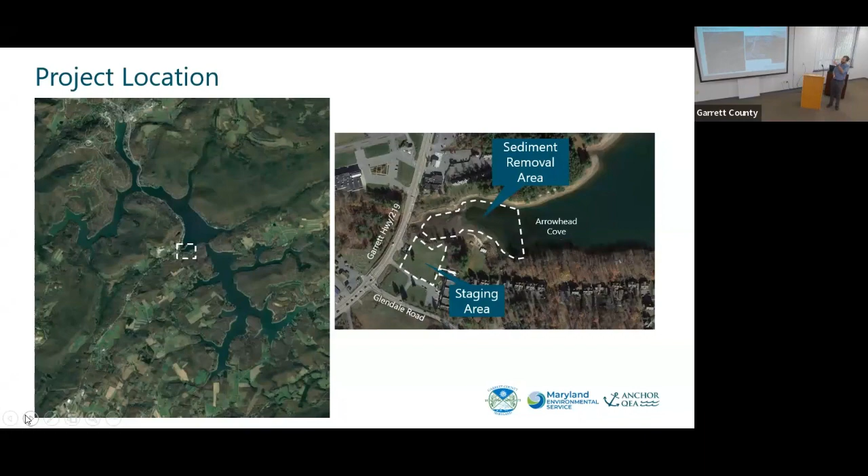As Bruce mentioned, most of you are familiar with the lake layout, but just for reference, the sediment removal area we're talking about is Arrowhead Cove. The staging area is on the lawn area right adjacent to the inn. We're right in the dead center of the lake, off to one side. That dashed line represents the footprint of the removal we're doing inside that cove.

As Bruce had mentioned, we've got a long history within this area. Back in 1925 is when the original dam was constructed. 1980 is when DNR took over some of the responsibilities. Then back in 2000 is when DNR actually purchased that lake bottom and took on more responsibility, including the buffer strip, which was purchased from the hydroelectric facility.

Obviously it's a very large lake, about 3,900 acres roughly, with a lot of side coves. As you're all aware, it's a very large recreational hub for this area. You've got a lot of use during the summertime, and that's when you've got higher water levels compared to the lower water levels in the winter.

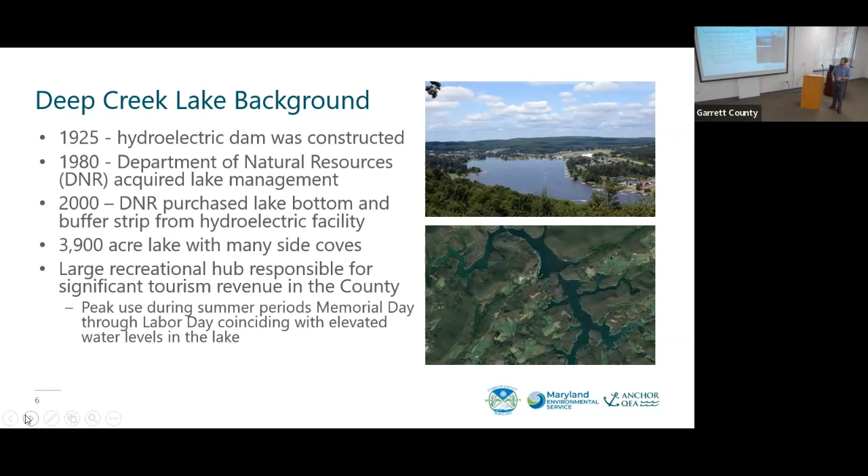So the major issue we've got right now is this sediment accumulation.

Do we need to pause for anything? No, I'm just trying to get rid of this. So you can see a little bit more.

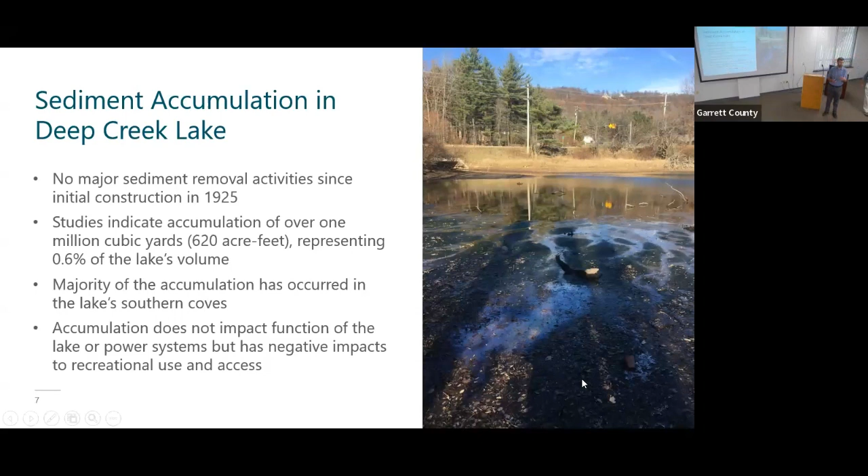For reference, sediment accumulation has been ongoing since this was built back in 1925. Ongoing sources of sediment into the lake are something to be concerned about, but studies indicated there's a lot of volume, and right now the majority has accumulated in the southern coves. It's not actually impacting the lake's ability to function as a lake system, but it does have negative impacts on recreational use and access to a lot of these areas, particularly those southern coves.

Each of the coves as part of that study were evaluated on a series of point rankings for all these different criteria. Looking at how things ranked out, Arrowhead Cove ended up being the eventual selected cove back in the 2016-2017 study.

There's a lot more information on this study available. It's on the website, so there will be a link at the end of this presentation, and it's in the information provided in the back. If you have questions on how we got to this point, there's a lot of information available there, but I'll continue on to the rest of the information from here.

So how are we actually going to do this sediment removal is a key question. Mechanical excavation - you might hear us call it dredging, but mechanical excavation is really the target for this project. We're looking at taking out up to 15,000 cubic yards. That may vary a bit depending on the available budget. We're going to have a bid coming out that's going to be selected, and we may have to adjust that volume slightly, but the target is up to 15,000 cubic yards.

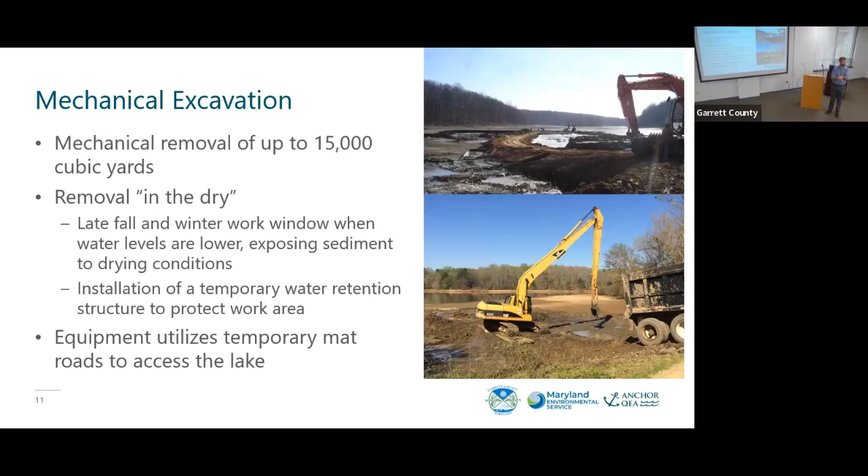A little bit more on the water retention structure. Again, we're going to be holding back some of that lake water. The easternmost portion of the removal footprint does not get fully dewatered, even at that low water condition of the winter. So we're going to be using a temporary structure to hold that water back.

We're going to be allowing the contractor their options, but essentially these structures will help retain that water out of the work area. And then we just have to manage either stormwater and anything else that kind of leaks through the system a little bit, rather than having to deal with all the sediment in the wet.

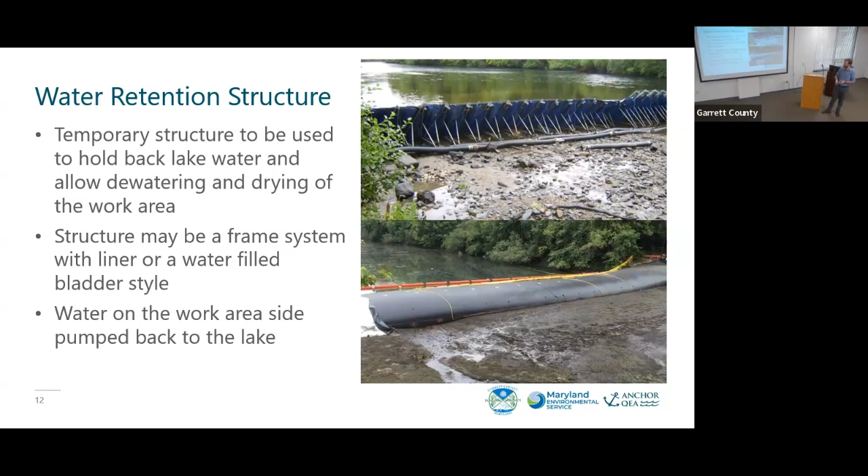The main focus of this removal and the footprint that was developed was for increased recreational access. You can see the overlays of some of the docks that we'll be capturing and getting allowed a little bit more access to some of these footprints. And we're also capturing material further back towards the creek entrance. That's going to allow material to deposit over the years so that this doesn't continue to occur for a while.

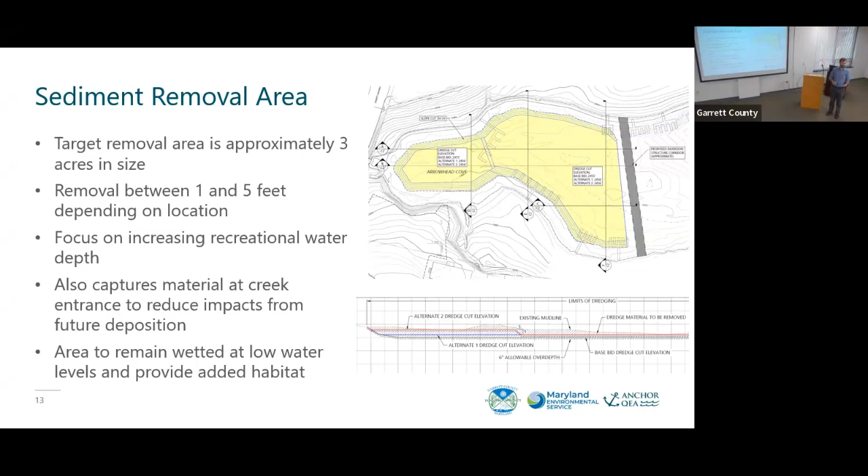We'll be able to allow some of that material to settle out before we get to the rest of the docks, so we can do some of that clean out. And this is also going to increase the wetted footprint over the winter time, which is going to be a little bit more of a habitat benefit and less of that mud flat exposed footprint that you'd be seeing normally.

From there, we'll jump to the staging area - just adjacent to the work. One of the other reasons that Arrowhead Cove was selected was the availability of the footprint right adjacent to the inn. Most of the footprint's really going to be a stockpile area.

Even though the sediment's going to be dewatered prior to the installation, once we get that dam installation installed, it's going to be drying during that entire process. There's still going to be a little bit of water, especially as you get a little bit deeper into that sediment. So as material is removed, it'll be hauled up to the stockpile, placed there. And that stockpile area is going to be graded and drained to a sump, essentially, to collect any remaining water coming off of that.

If you ever scooped up a bucket of sand, that water that weeps out, we're going to be collecting that, filtering it, and then discharging that back to the lake. That's going to be contained within the stockpile footprint.

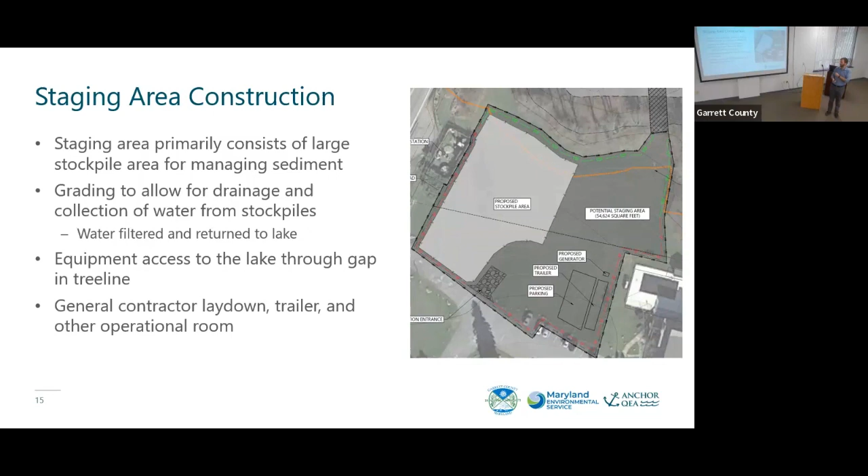Entrance and exits we'll talk about next. We understand traffic has been a big impact to the people that live and work in this area, so what we're working on right now is developing that traffic routing. The anticipation is coming off of Garrett Highway, making a right turn into the property, that way we're not slowing down traffic or crossing multiple lanes, safe and easy access coming off that side.

Exiting, we come out onto Glendale, make a right, and then make a left turn onto the highway at the stoplight. So we're not having trucks crossing a lot of traffic, keeping that relatively simple. There may be some occasional deliveries that break that out depending on which direction they're coming from, but this is the majority of the traffic routing.

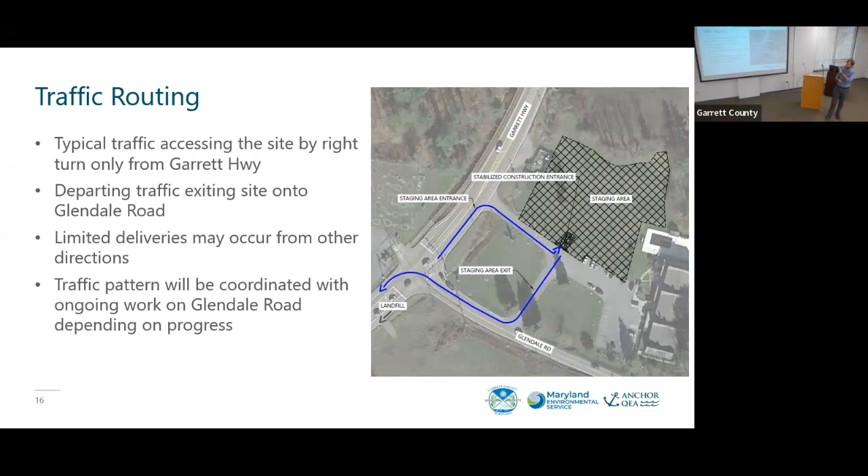We know Glendale Road has a lot of construction work ongoing right now. We'll be coordinating with them depending on how that proceeds the rest of this summer. The anticipation is the work out in front of this footprint will be done before we start our work. If that's lagged, we'll coordinate with that contractor to understand how traffic may be adjusted, working with those guys doing that work right out in front.

From there, the sediment reuse. One of the key things to keep the cost of the overall project down is we don't want to dispose of the material or pay a landfill disposal fee. The testing performed on this material shows it's clean sediment from this pristine lake. We really have no issues with it, but we need to find a place for it.

Earlier on during the design evaluation, we looked at a lot of close options, including the landfill that's just a few miles away. Essentially, that landfill needs cover material for their daily operations, and with this clean material and a relatively short haul distance, we can provide a large source of material for them to reuse as part of their daily operations.

We don't need to pay a tipping fee, and they gain as far as providing extra material. It's material that's very consistent and clean. A lot of times they'll get borrow material that may not be as clean or may be coming from different sources. This gives them a lot of good, clean material that they can use.

And they've also got a lot of space. If there's any remaining water with the sediment, they can spread the material out and allow it to dry further as needed.

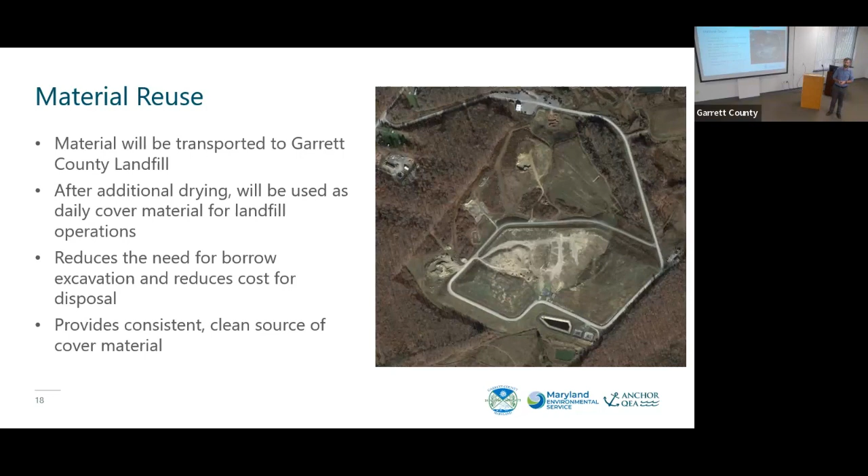From there, site restoration. We'll be doing a couple different features: some in-water restoration, and restoration of the staging area itself. There will be some in-water habitat structures installed along the edges of the dredge area after all that sediment removal. This was a request working with DNR, and essentially rock clusters will be installed close to the shoreline outside of that boating footprint.

These generally consist of large boulder structures about 3 feet in height or so, providing some fish habitat, some places for fish to hide, trying to increase that habitat value.

Now that we're deepening this, it'll be wetted throughout the winter. We've got some options for increasing the habitat footprint in this. Eventually, there will also be submerged vegetation installed, though that won't be done by this particular contractor.

It's something that will come a little bit later in 2024, but that'll be a larger footprint that's expanded out adjacent to some of these areas.

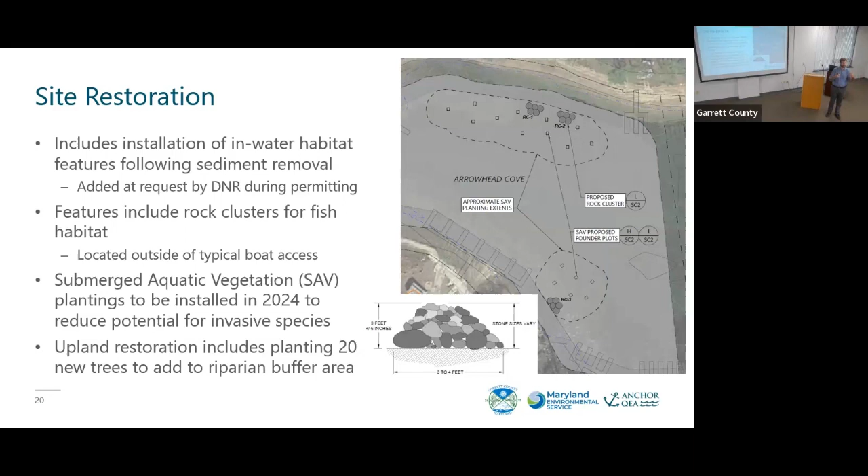On the upland side, after we've done all the grading work and removed the staging area, that grassy area will be reseeded, and there's actually going to be installation of 20 new trees. The riparian buffer, that tree line, is very narrow, and working with DNR, we're looking to increase that tree buffer.

To provide a little bit more break point between the upland area and the lake itself. So what to expect - obviously there's a lot of concerns and questions about what we're going to see during the construction. From the noise perspective, they have to comply with the noise ordinances, just like any other contractor.

The work right now is looking at 7 a.m. to 5 p.m. We're going to be getting into the wintertime, so they'll probably be cutting that off a little bit depending on light. But a lot of the truck traffic is actually going to be ending a little bit earlier because the landfill closes at 3:30. So there may be some additional work done on the site, but a lot of that truck traffic is going to be done by that point.

From the traffic sense, we're going to have some heavy equipment showing up at the start to help build that staging area - getting the excavator, the loaders, the different pieces of equipment out there. After that, you're primarily going to be seeing dump trucks hauling that sediment from the stockpile area to the landfill. For reference, we're somewhere on the order of maybe 10 to 15 trucks a day running during that period.

So you're seeing a couple each hour, just for general reference, and again that's heading down to the landfill heading south on 219. From the safety sense, we want to make sure we don't have any issues with the public, so the site's going to be fenced off, traffic patterns clearly marked. We're looking to do everything we can to make sure the trucks and other equipment are accessing that site as safely and cleanly as possible with as little impact to the public.

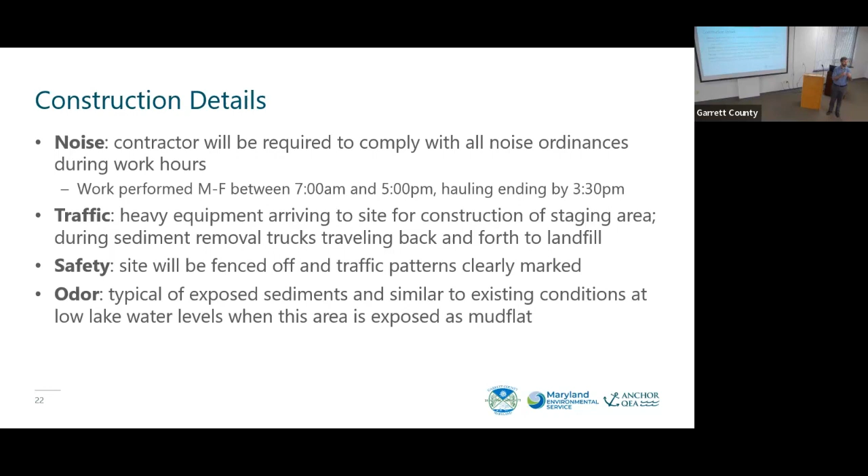And then a question that often comes up when we deal with sediment is odor. So essentially when you're exposing sediments, there can be a smell associated with that. We did want to point out it's very similar to what you're dealing with right now - there's really not a lot. And when it's dried out, you lose a lot of that odor-generating material. So as we're drying out, it's going to be similar to how it would be at the very end of the year, with very little additional as we're storing it and taking it off site. So pretty typical to what you may see during the regular year.

Schedule - right now the project's out to bid, and we're actually going to be doing a bid opening at 1 o'clock on Friday, so we'll have a little bit more information at that point. We have to go through selecting the final contractor, negotiating the contract details, and developing that final notice to proceed with the contract. That's expected to come later this summer.

There is some additional permitting coordination ongoing. We've got most of the major permits - MDE, coordination with DNR. There's a couple of the smaller permits we're still working on; they'll be finalized over the summer.

Construction start after Labor Day - just for reference, that's most likely looking at starting some of the staging area construction. What we're looking at is with the water level dropping after Labor Day, the contractor is expected to start the in-water work a little bit later. They've got at least a month's worth of work trying to set up that staging area, get their equipment, and get the grading worked out.

So it'll be a little bit later after that, but we may start to see some activities after Labor Day. Again, as we get more information when we select a contractor and get their schedule, there'll be updates on when this is going to actually happen that we can provide later this summer. Just for reference, based on the permits, everything has to be done by March 1st - everything has to be out of the water, fully complete. So as we get started, we'll be working through the wintertime, with equipment pulled at the very latest February 28th.

That's the primary work. There will be some more activities in 2024 - there's going to be seeding of the staging area, and there's going to be that submerged vegetation planting, but the majority of the work's really done this winter.

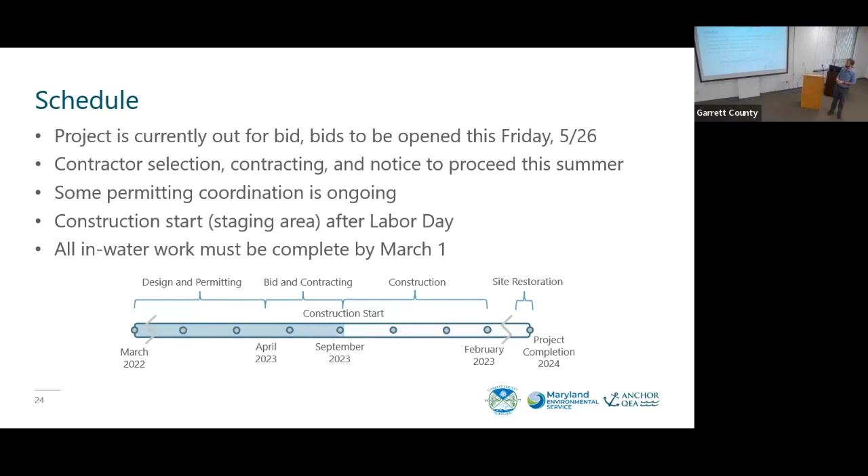I suspect you're going to find a lot of wallets and sunglasses. What's your name? We'll make sure we look for yours.

I generally understand where the cofferdam is going to go across just from the map. I'll have to go walk the shoreline up from our place to look at it. But generally, how deep is the water there on the water side of the cofferdam? Do you know? It's going to be about 6 feet or so at the deepest point. So it definitely drops down and then comes back up.

That was my other question. Do you anticipate the lake being dropped more than it typically is? Not currently. No, no.

Okay, so I don't know, Bruce, do you want to? We hope we can do it this year, but don't give up completely on it. No, we're not, and we're in communication with Brookfield on a regular basis.